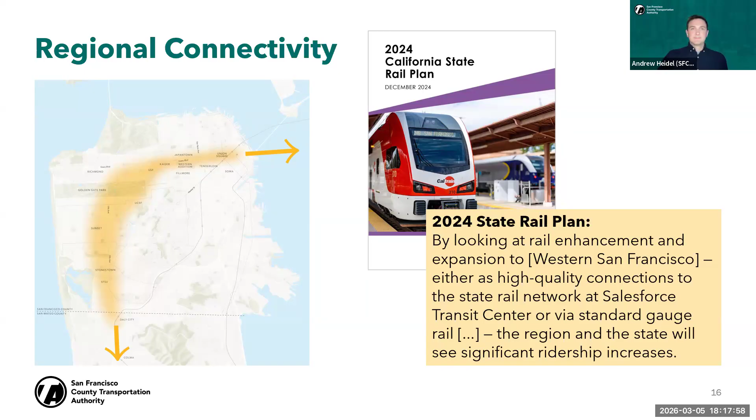Connecting the Geary and 19th Avenue segments has more options and less certainty. With a more eastern alignment, potentially turning at or near Masonic, the subway could directly serve areas with existing and established residential density, as well as important regional destinations like the University of San Francisco and UCSF Parnassus campus. These areas, however, are also already served by a higher density of transit than points further west and enjoy relatively short travel times to and from downtown today.

By continuing further west under Geary Boulevard before making a turn to the south, the subway would have the opportunity to not only serve important regional destinations like Japantown, Kaiser Hospital, and USF, again, as all alignments would, but it would also directly serve areas not well linked to regional transit today, shortening journey times to and from the Richmond. A number of options in the middle would help support adopted plans and policies by serving housing growth areas, still enabling faster regional connections to places like Golden Gate Park, the Inner Sunset, and again, UCSF, all of which draw regional visitors and local trips.

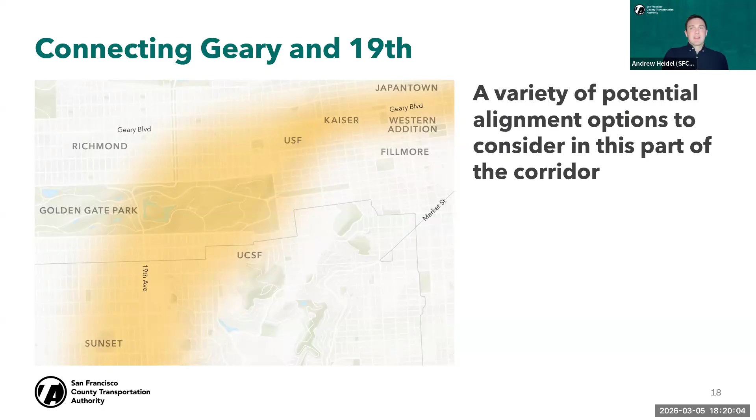This is also where potential phasing options for the project could be developed further. So, for example, rather than building all 10 miles of the project at once, segments that have defined benefit could proceed, anticipating future phases. For the southern project terminus, we considered options to create either a passenger connection or a through running opportunity, depending on technology, as far north as the Daly City BART station and as far south as the Colma BART station. For the purposes of our analysis, we assume Daly City as the tie-in, but understand that to do that, physical improvements may need to eventually stretch further south.

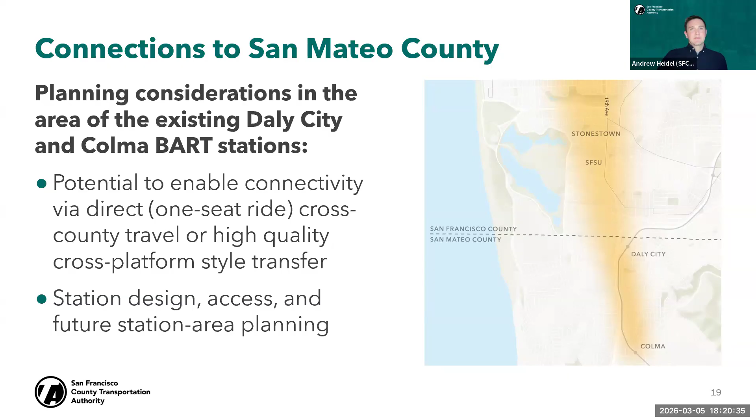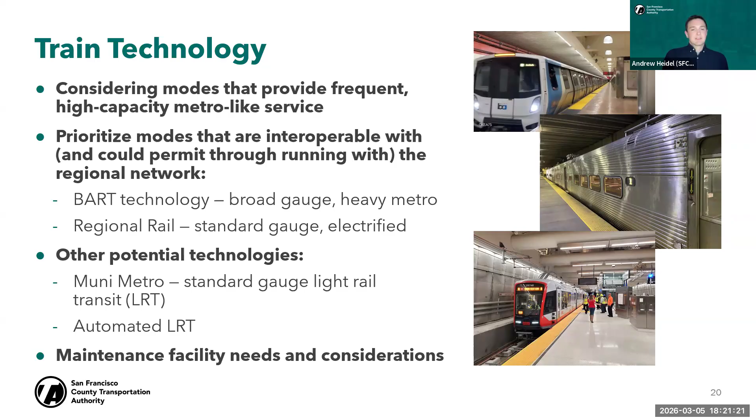Closely related to that question is the technology for the subway. So for the purposes of this project, we're considering modes that can provide frequent, high-capacity metro-like service that's reflective of the demand in the corridor. The study does prioritize modes that are interoperable with and could through run with the regional network. So that's BART technology, broad gauge heavy metro, and regional rail, standard gauge electrified. Not quite what you might see on the Caltrain corridor today, but something that could interoperate on a railroad like that. We're also considering other potential technologies, Muni Metro, light rail transit, or automated light rail, which is used in places like Vancouver. We also want to consider that depending on technology, we could have an impact on where maintenance facility and storage for vehicles might need to be sited.

What does this all mean with respect to performance results and improvements in the three areas we talked about earlier: traveler experience, supporting San Francisco's growth, and larger public policy goals? We tested those key questions while identifying and exploring other considerations to understand what the subway project's range of benefits might be. We're happy to see improvements across all three of those key areas, and I'll get into more detail about that in a moment.

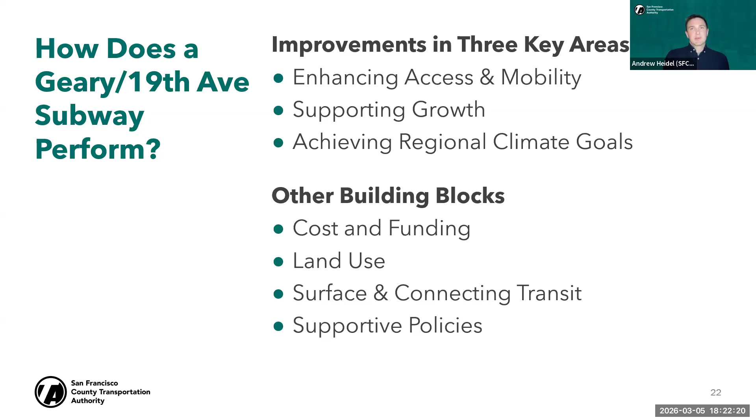We also identified what we'll recommend as other critical building blocks to advance as part of or in parallel to additional project planning, speaking specifically about funding, land use, how connecting transit might work, and what other supportive policies can help maximize the benefits we'll see and perhaps help pay for the project. So on the next few slides, I'll share what we think are the key takeaways for planners, community members, and decision makers going forward.

First, we believe the overall case for the project is and remains promising and has the potential to be an integral part of the regional and statewide rail system. We'll recommend that San Francisco should continue to lead and advance planning for the project to prepare for the future, with the knowledge that maximizing project benefits also creates the opportunity to create value in time savings for travelers, the accessibility and value of land, and economic activity and productivity, and that capturing and leveraging that value will be critical in underpinning the funding for the project, given its potential high capital cost.

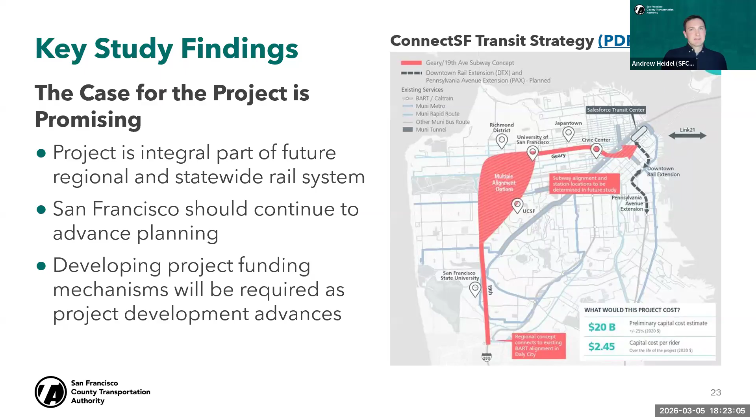We'll talk more about that in a moment. We also note that there are trade-offs. It's important to deliver benefits to existing residents and businesses while mitigating potential effects such as displacement.

Next, we've confirmed that regional connectivity is important towards delivering the most amount of benefits to travelers and communities. The project does perform well as a San Francisco-only subway, but performs much better when it is integrated with the region's rail network. These benefits increase not only for San Franciscans, but travelers across the region. Put some numbers to that.

So depending on the route, a San Francisco-only subway could see between 160 and 180,000 trips per day, matching today's system-wide BART daily ridership as a point of reference. That could increase to over 300,000 trips per day with regional connectivity. So on an individual level also, some trips to, from, and through San Francisco could get shorter by as much as 20 minutes with those regional connections as well.

Our same analysis showed that multiple design options can deliver benefits. So as the project advances, clear input from community members will be important to balance with technical considerations to select routes and station locations. Project design decisions have the potential to drive the ultimate cost of the project. We currently estimate the full cost of the project to be between $20 and $30 billion.

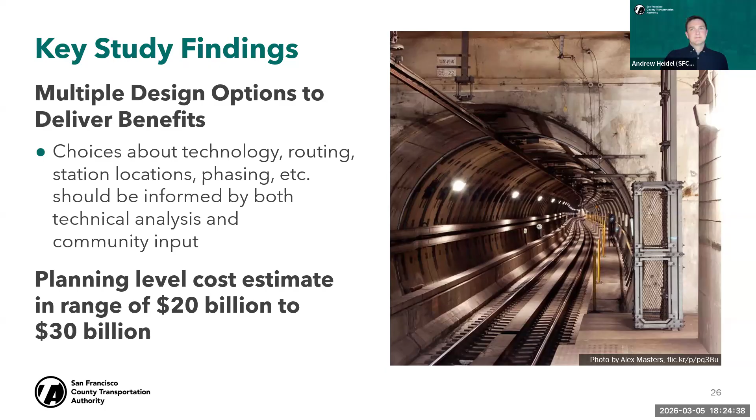In future phases, we will also need to consider what project phasing might be. For example, if there is an initial segment that can deliver some benefits at a smaller cost, while still anticipating the full build-out of the project. To give some specific examples of that, there's only small differences in system performance between the different downtown options, or those that connect between Geary and 19th Avenue, so they performed similarly in overall ridership estimates. But who specifically benefits or who specifically rides could vary depending on what areas are served.

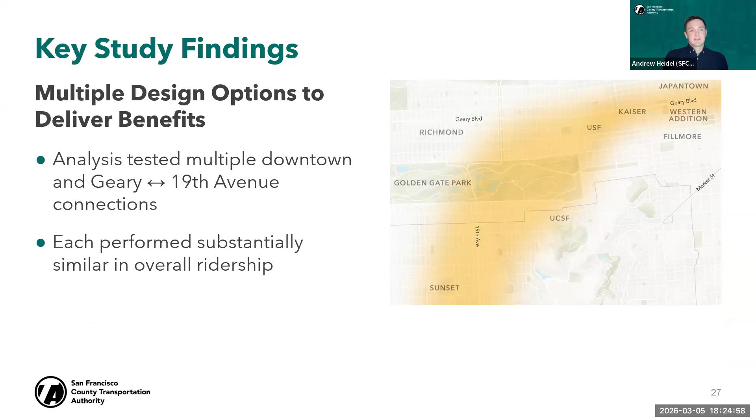Speaking to our passenger experience, regional and statewide climate and equity goals, we found that the project moves the needle in the right direction in each of these versus a future where this project isn't built. And the good news is that our analysis shows that the people who benefit the most are those who live in communities that have been historically disadvantaged or excluded from this type of project and project planning work.

To give some examples for travel time savings, let me explain this one. The project increases the number of jobs accessible by the average San Francisco household within a 45-minute transit trip by about 45,000 jobs, 6%, on a San Francisco-only alignment, or 57,000, that's 9%, with regional connections. To highlight some of those equity benefits, residents of San Francisco's equity priority communities gain even more, with 57 to 72,000 additional jobs.

The project also shows reduced vehicle miles traveled and greenhouse gas emissions, which is a 4% reduction citywide. That's 400,000 miles per day. Just as some context, it's very rare that we see a single project that can achieve even 1%. So this is good performance here.

Some other stats: equity priority community residents represent about 20% of the boardings of the project, but experience 50% of the travel time savings, and also represent about 50% of the net new transit boardings. So that is folks that previously did not use transit, but do today.

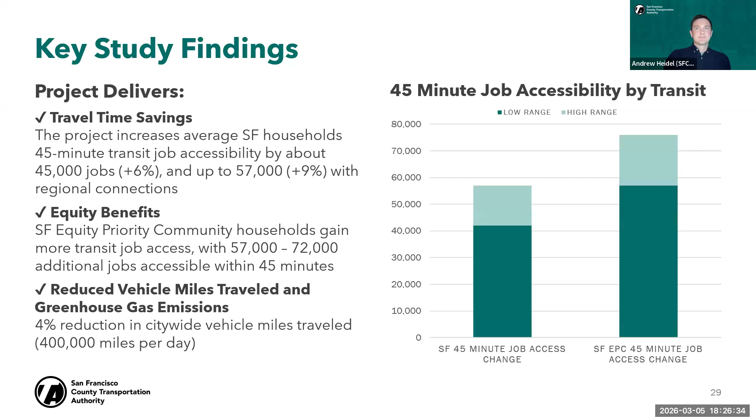As we think about what it will take to deliver the project, it became evident that the benefits will need to be regionally significant to attract the full package of local, regional, state, and federal funds that will be required. That includes decisions about the project itself. We already touched on the integration with the regional network a few times, but also supportive policies adopted by the city and neighborhoods, like land use, parking, and transit decisions.

As we see, major transit investments have to secure support not only from local sponsors, but from funders at the regional, state, and federal level. We do expect the project to perform well under traditional federal grant criteria. That's the FTA Capital Investment Grants Program. Criteria for that: project justification around improvements to mobility, environmental, congestion benefits, land use, and economic development.

But to position this project for success, our local strategy typically comes down to the local financial commitment. The best way for a project to be competitive is to demonstrate how we can afford it by providing a local match. Local funding is a critical part of this process, and why leveraging those sources will be important. But we do need to think creatively about new places to look for funding, as existing sources are not enough to fund a project of this size.

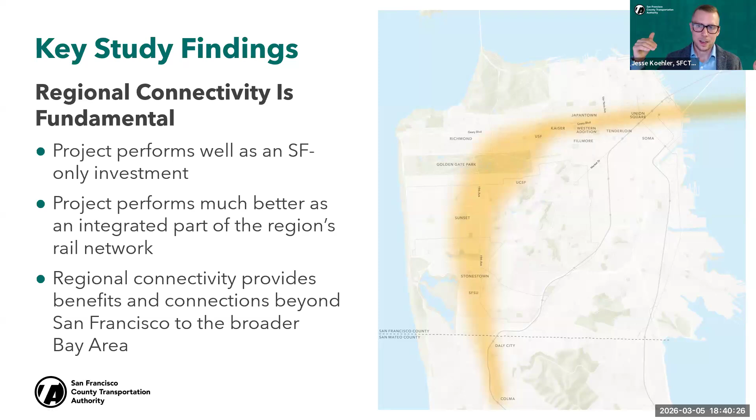And at the level of planning such as this, it is appropriate for planning for multiple projects to go forward. That will help shape future updates to the, if you don't mind switching to the SFTP slide, Andy, and the SFTP PBA slide. That project-specific work will help us get ready for these countywide and regional planning processes.

The next update to the San Francisco Transportation Plan in about 4 years will be the stage at which we would expect to see project prioritization happen at the city level. And that prioritization will take into account our local criteria, things like environmental sustainability, equity, economic vitality, safety, livability, as well as consider the affordability and fundability of the project, as Andy spoke to, which is also a key consideration

for federal funding. Similarly, at the regional level, there's a prioritization in the long-range transportation plan that MTC produces to develop the region's priorities and make those projects eligible for federal funding. The reality is that these projects take a long time to develop, and the investments would not happen all at once in terms of their delivery.

And so to keep us competitive for funding opportunities over time, multiple projects would be advancing through the planning process at the level of individual projects, with prioritization happening ultimately through these countywide and regional planning processes as the project's definition and alternatives analysis is more mature.

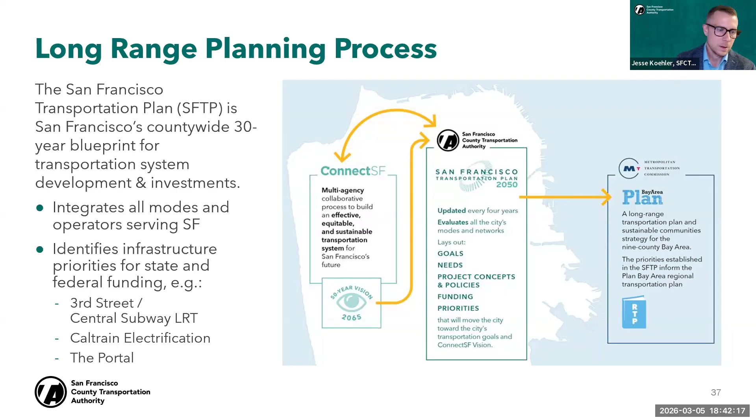Andy, there were a few questions about, and sort of speaks to what I was just speaking to, just about time horizon, about the stages of project development and approximate time to move the project forward. Yeah, let me switch back to that slide. Sorry for the fast scroll here.

So thinking about this long-term arc, assuming funding is available, we are still looking at 15 to 20 years from beginning to end. And I will say, as Jesse mentioned, that funding is not all sitting here waiting for us to use today. So I think as we start to think about, we can be more specific about the immediate next phase of the alternatives analysis. So we also do not have full funding for that phase, but we do have some to move forward in our Prop L transportation sales tax.

So thinking about what could we potentially do with that in the near term and move forward to an alternative selection in the next few years. As we start to get into the future development phases here, the environmental review, design, and engineering, these are all multi-year efforts in and of themselves as well, which, as Jesse and I have mentioned, represent a significantly larger investment in resources. This is where we would start to get, as Jesse mentioned, past that point of regional prioritization and needing to think about where we as San Francisco and we as a region want to focus our resources on our next large capital investment.

We had a question, just another question, thanks Andy, back to cost estimates about the planning level estimated costs. Those are in current year dollars, so escalated to a potential year of construction, they would be somewhat higher depending on that assumed date.